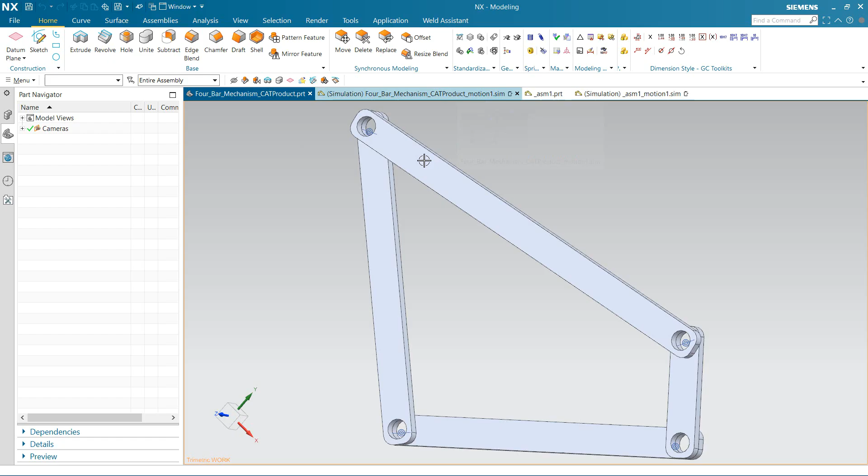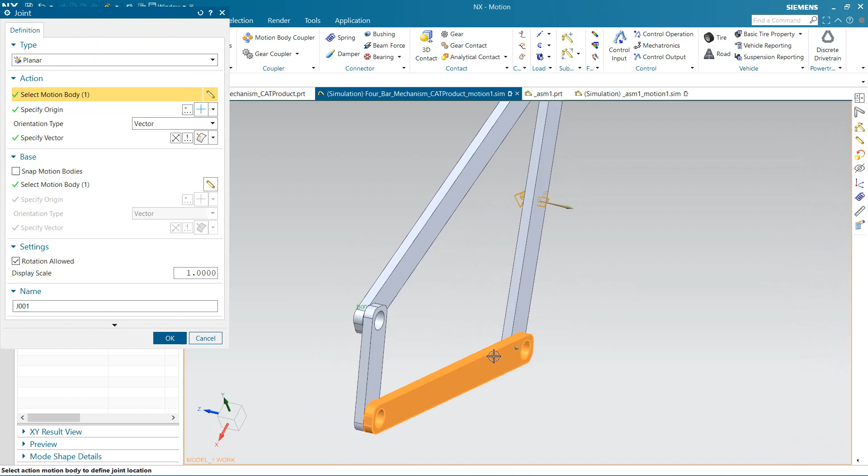So let's get into it. I just need to put these two things together. This is called a planar joint. So basically, if you want that thing here to stick to this plane of the object, or just stick to any plane, you can do that.

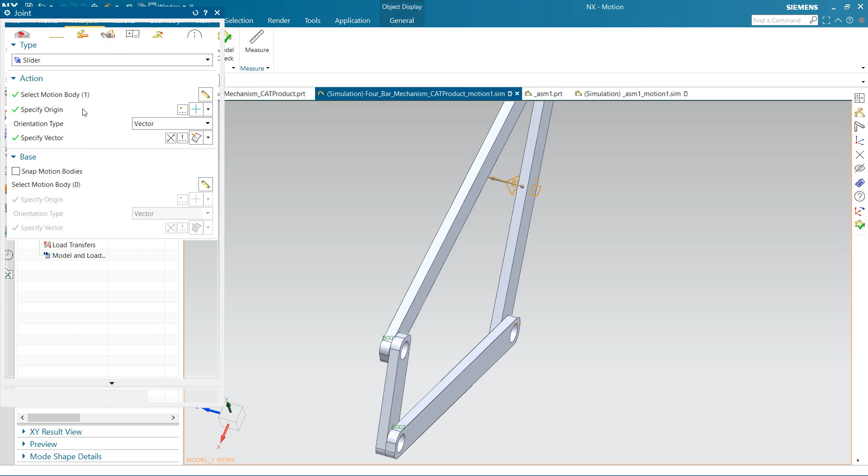I also created a slider joint here. Let's see how it works. Just play that. As these two join here, the slider joint only applies to these two bars. So as these two bars move, I attach the planar joint from up to this thing attached to this plane over here, so this thing will always be in contact with that plane, and that's why it's moving with it.

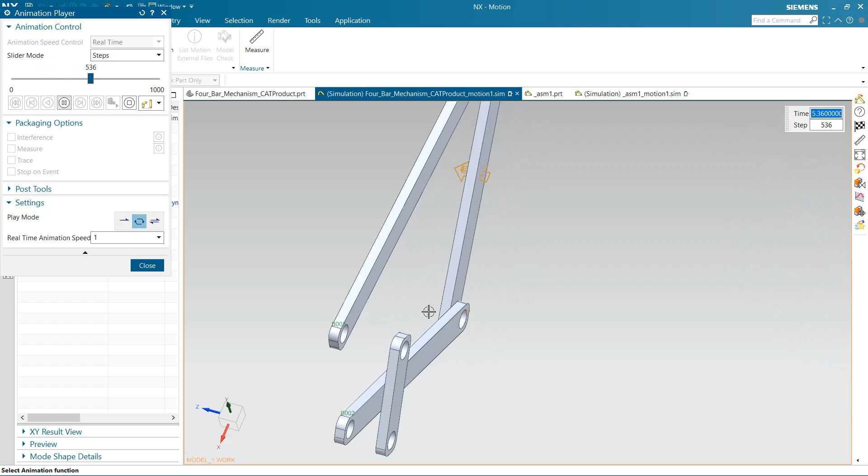Let's see what I want to say again. This thing here will always move with this thing, as you can see. Now let's try to do it. These are very simple ways, so just delete the solution. Two bodies that I want here - we don't really need to lock anything down, it's just a basic mechanism.

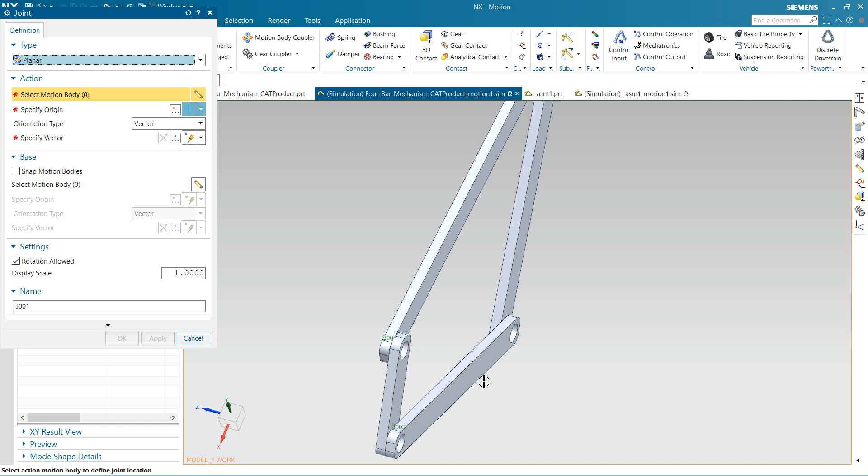So let's create a joint. First, attach this one to this one here. The vector, I will say there. Origin, I will say there. Click OK, and I think that's it. Yeah, that's a planar joint for us.

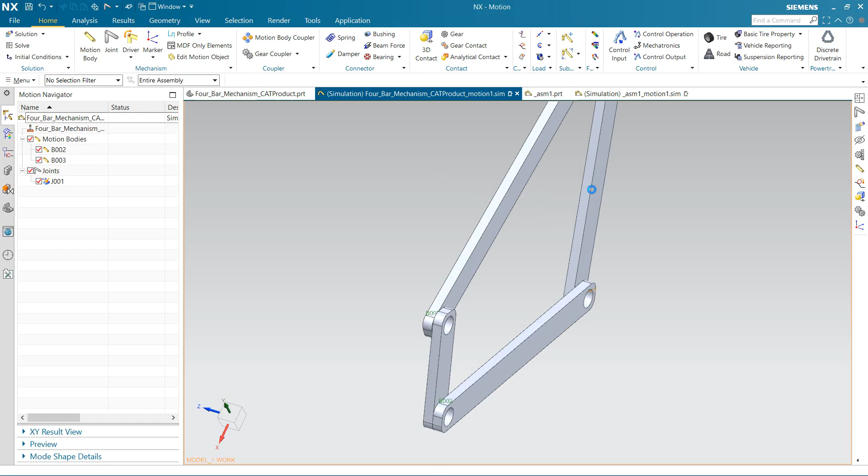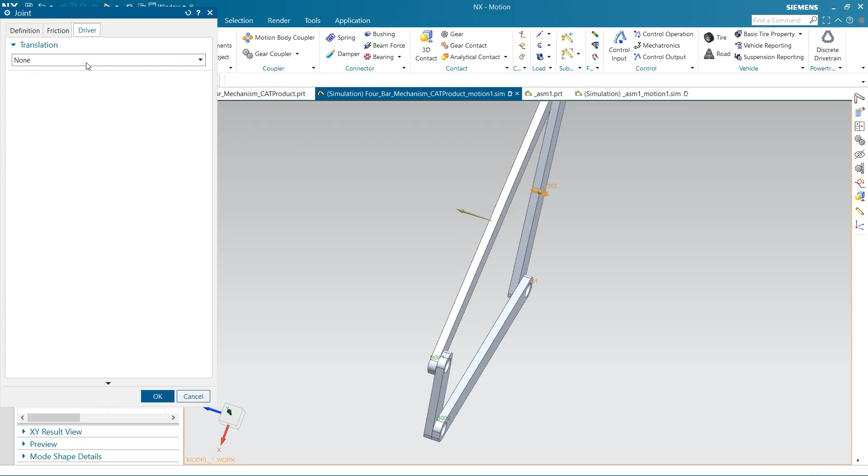Now let's create a sliding joint. It's actually anything that you want, I just want to create a thing so you guys can see it more clearly. Vector, I would say this side here. Need a driver, sorry. I would say 10, maybe 10 to 15. Let's try it out. Solution, 10 seconds, make it long and solve it.

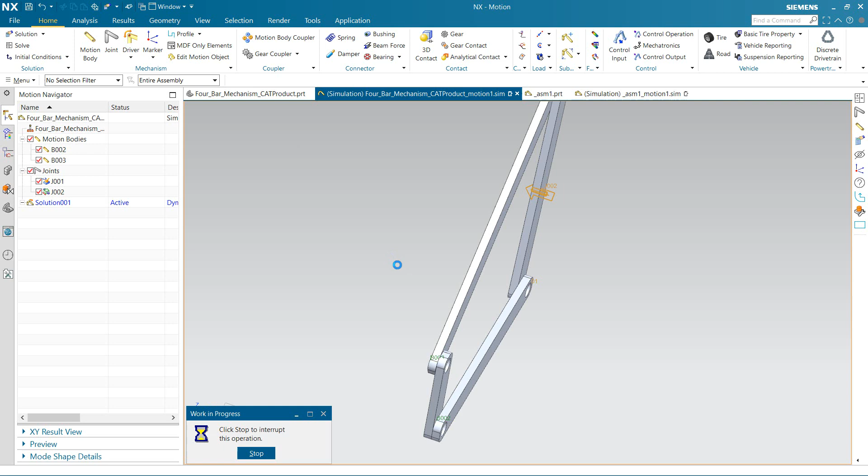Okay, let's try it. So that's the joint for you. It's very easy to use, and it can be used for many other reasons, like the bone structure of a human actually uses this joint. So if you want something to resemble that, this is actually a choice for you to use this joint. I think there's many applications out there that use this joint.

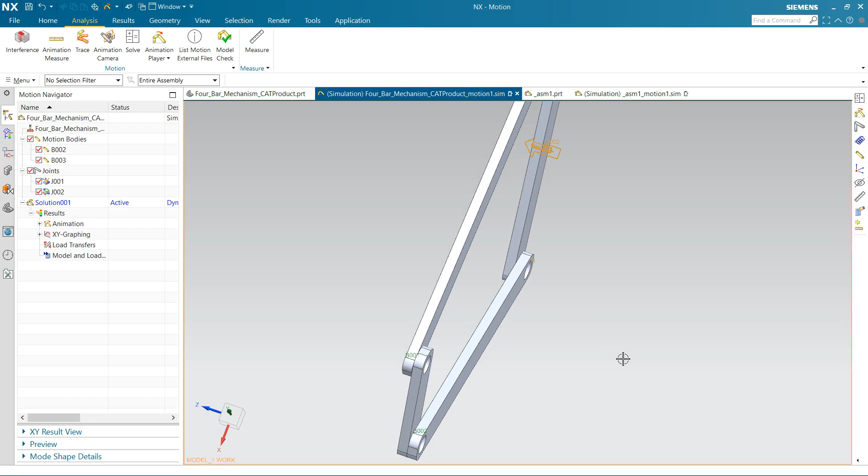So the next joint I wanted to talk to you guys about is the inline joint. For example, if you want this head of the bar here moving up and down, however this head of the bar here will only move in the horizontal surface, you have to use that joint.

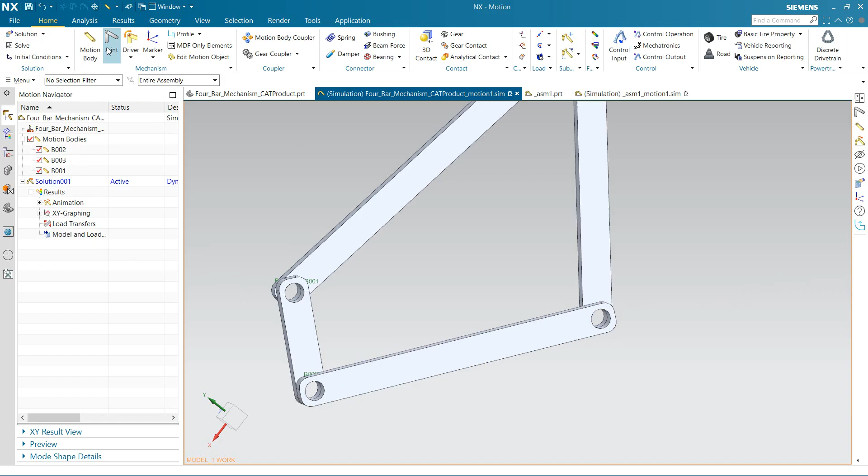So let's try it out. Delete that. The motion body, you have to create another one for this situation, which is this small thing here. This one will move up and down along with this small thing here, and this one will move horizontal. Let's create a sliding joint for this thing. The vector is that way. Let's click OK, it will go with the environment.

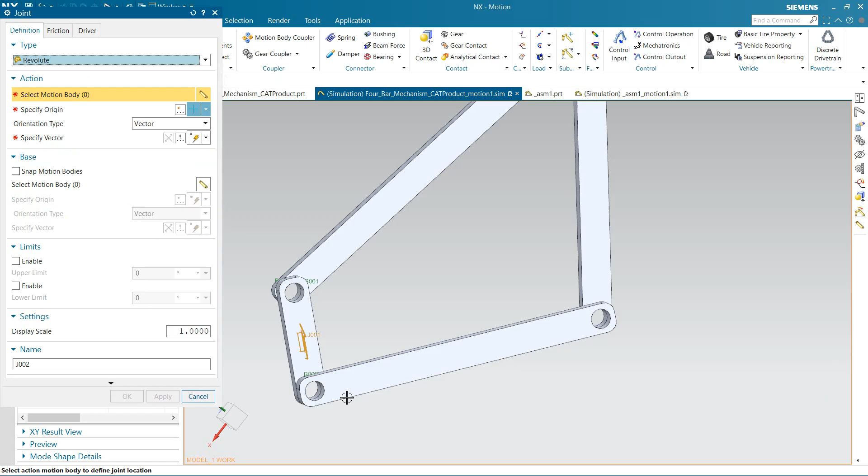I will create a harmonic function for it. I'll talk about that a little bit, but it will be much easier for you guys to see if you're using this function. Next, let's create a joint. This one here is actually spinning around this head, so we need a revolute joint. You guys cannot imagine right now, I don't know, but right after this, you guys will know how to use these tools easily.

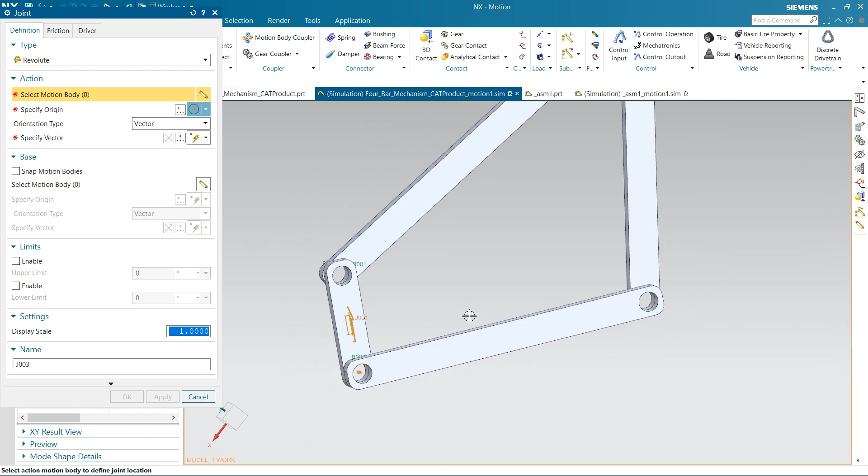You move along with this body here. So basically this one will spin, this bar here will spin along this bar at this point. So why does it move up and down? And then the inline joint here that I want to talk about today.

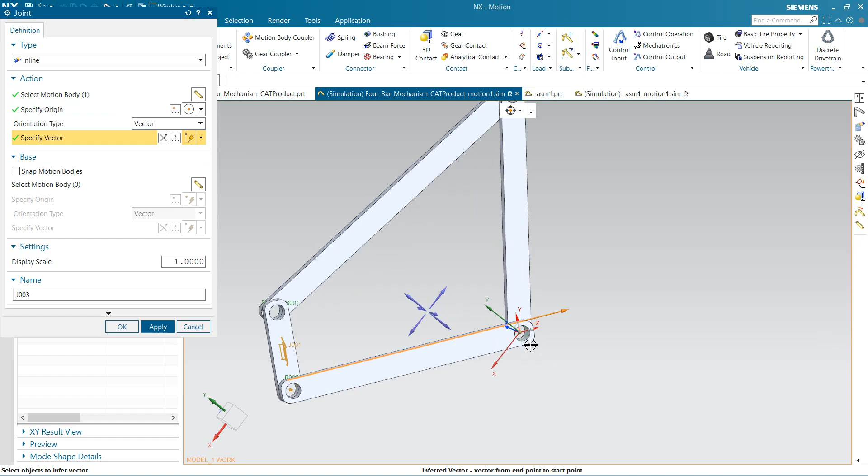So create a motion body, select another origin and the vector. So what it says in this setup of choosing here, it basically means that this point here will always be moving along this line. It's not going to go up, it's not going to go down, it's only moving along this vector here. That's why it's called an inline joint.

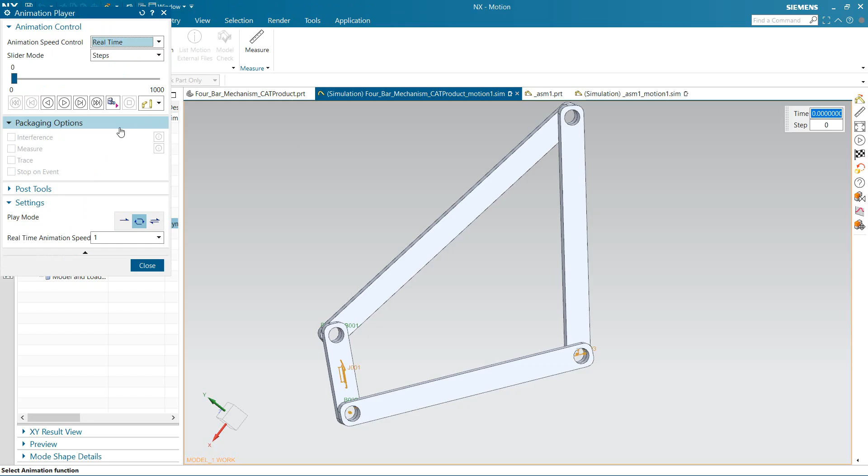Okay, I think that's it. So let's try to run it, see if there's any problem. I think it will be okay. Let's see. All right, it's good.

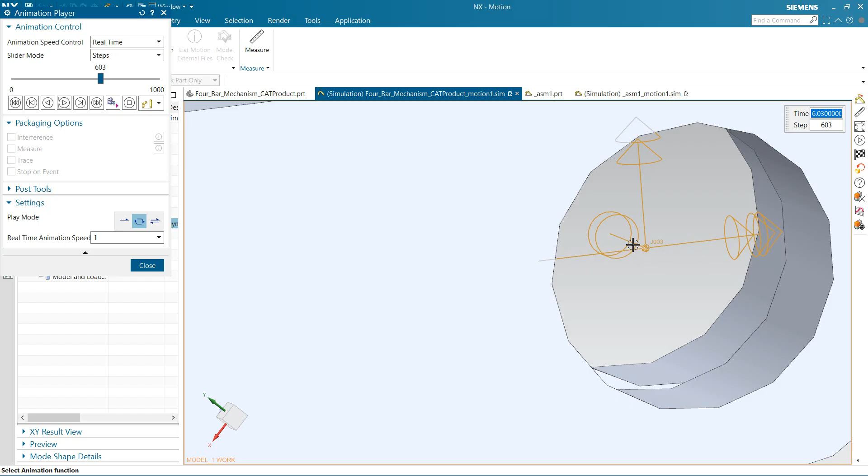As you can see here, this head of the bar here will only move up and down because of the revolute joint and the sliding joint. However, this head of the bar here only moves in this direction. These two arrows mean that it is restricted, however this here appears to be longer than the two other arrows - that's the line that this point can move along.

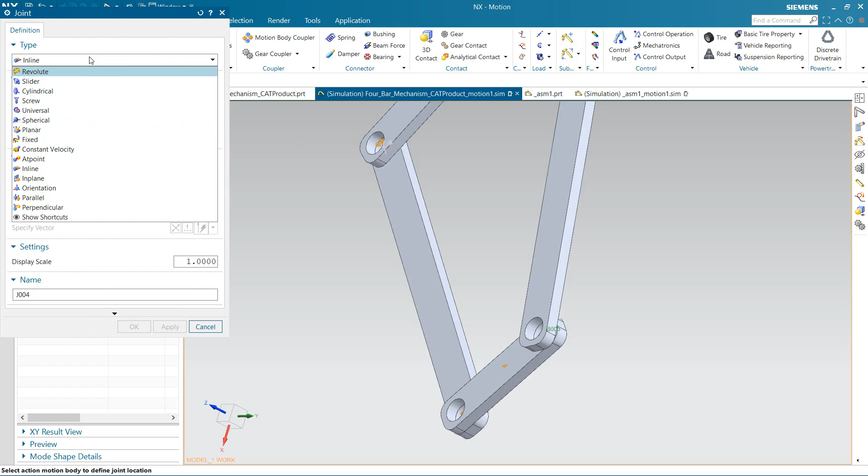Okay, so those are the two joints I wanted to talk about for now. Many people actually use this planar joint here attached to this part to remain stitched to the surface and remain stable on the surface for the mechanism.

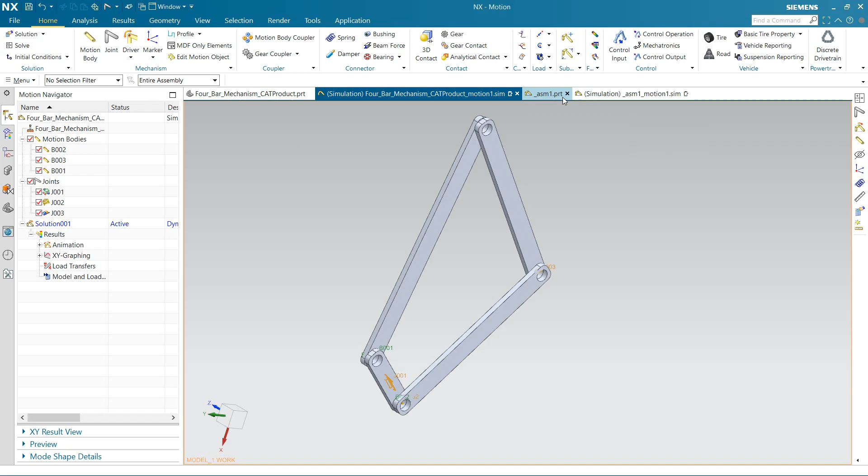But it's up to you guys to use that. I just want to talk you through the tools you can use. There are many complicated designs where you just want to use a mechanism and stuff. So next I want to talk about...

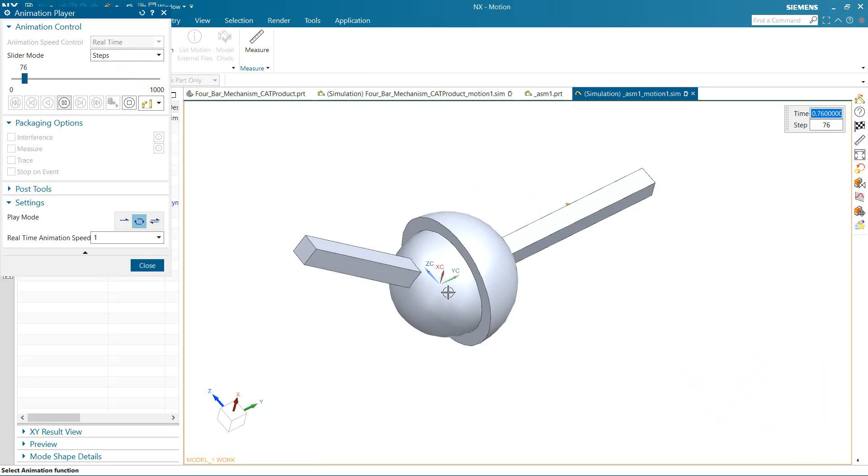This is actually like a spherical joint. Many people call it a ball joint, but in NX it's called a spherical joint. Basically these two parts will always stitch to each other, a surface with fit as in the design, and this thing will move along as well. It basically restricts all the sliding joints possible. The only thing allowed to move in this joint is the spinning, and it can spin anywhere, as you can see.

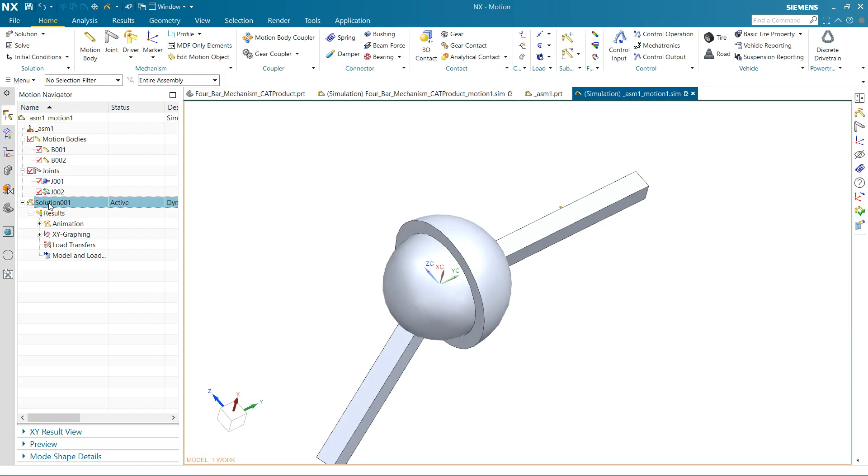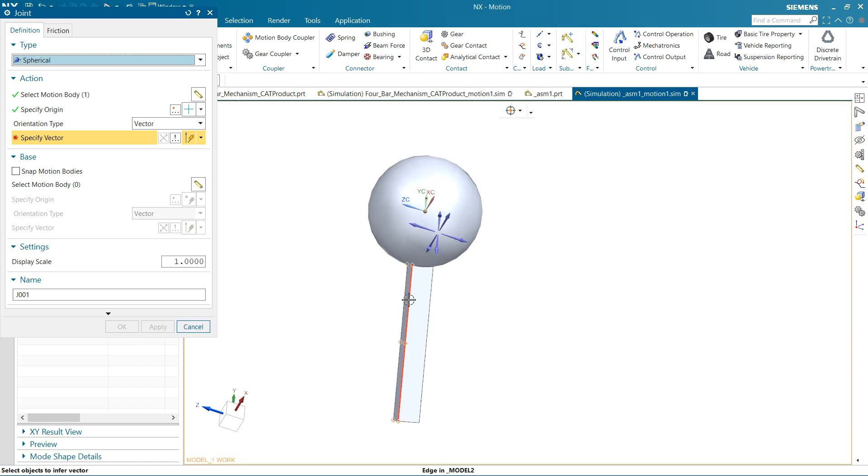Let's try that. First of all, delete the joint. Let's try some simple things first. If you guys do not choose the base body for the spherical joint, it will appear like this. Origin here, vector I would say along this bar. Just click OK, let's check that again.

Because I want to use gravity in this simulation, you would not use none for this mass and properties if you want to use gravity. If you use gravity, it has to have mass—either you define it or it's automatic. But you need to have some kind of mass here. In this case it's like 18 kilograms, and you need that number to use gravity.

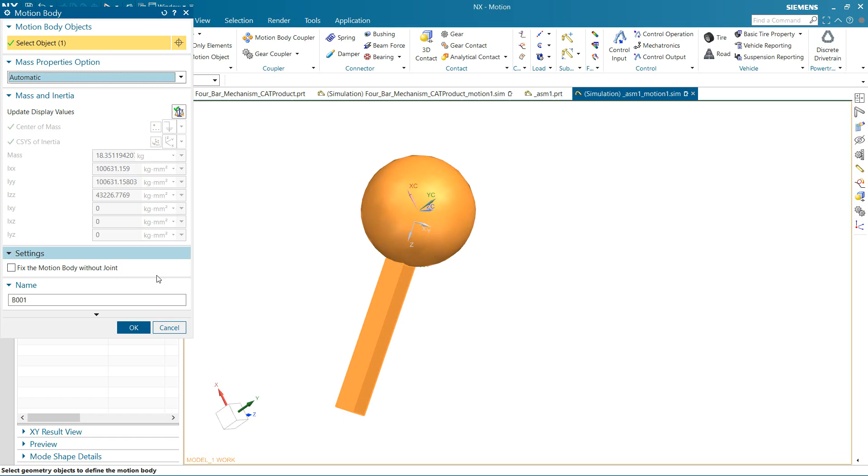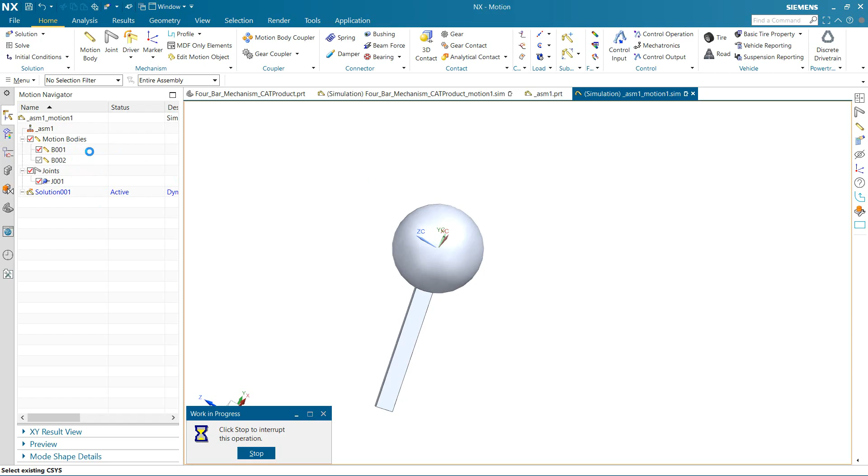So for the solution, I would say gravity. Okay, that's good, maybe 10 seconds. Let's solve that. If you don't put mass in there, you use none, and this thing here will just stay forever—it's not going to move.

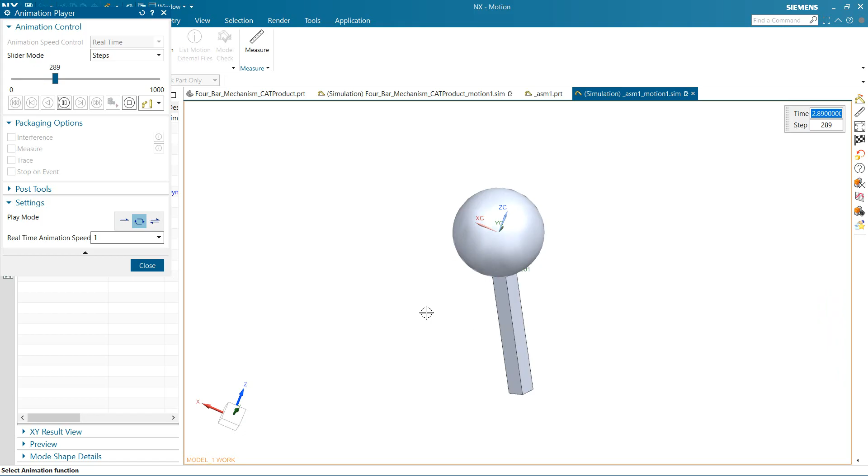So play it. Yeah, as you can see, it's only spinning up and down. The gravity is actually this way, so it's basically moving in a harmonic function, like a clock and stuff. Okay, so that's it. Now let's stitch it to another, a bit of higher level.

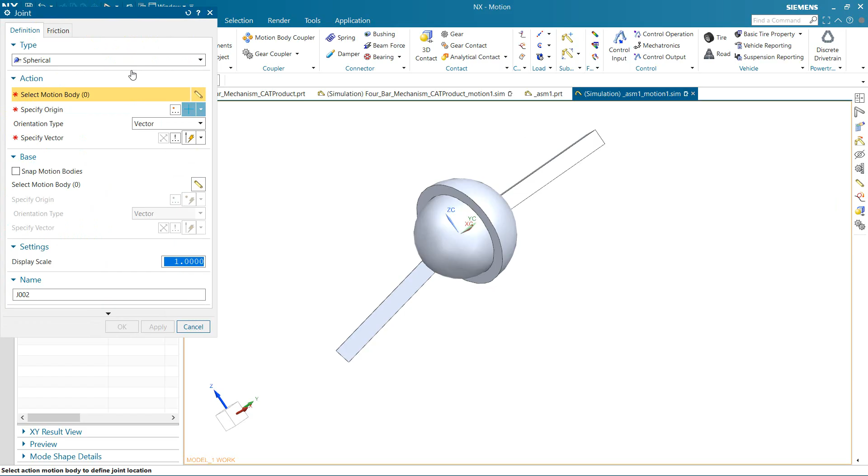If you want this here to stitch to this one, you basically just need to choose the base body for it. And then, like I did here, I would create a cylindrical joint motion body—base vector along this line, origin always at that point, driver. So this is like the combination of the sliding joint and the revolute joint. It can move along this line as well as spin along that center. So that is a very useful joint to use.

So let's say it's 15—no, no, sorry, that's 180. Translation, 15. Click OK. Let's check that again. All right, so solve that and let's try it.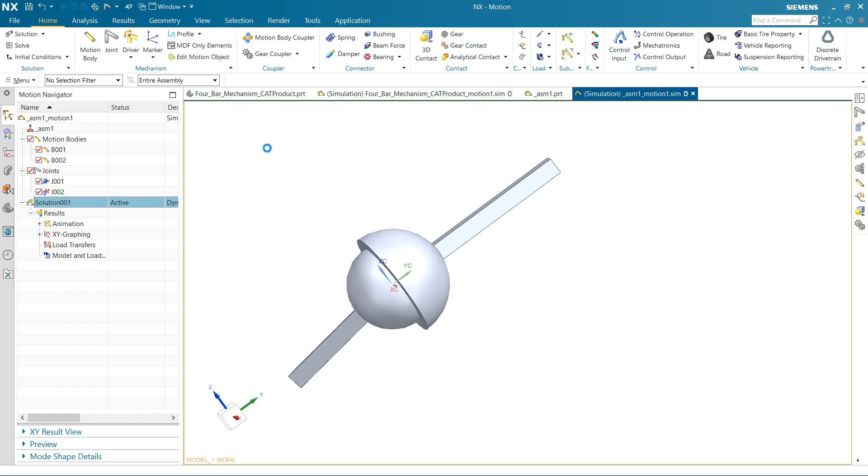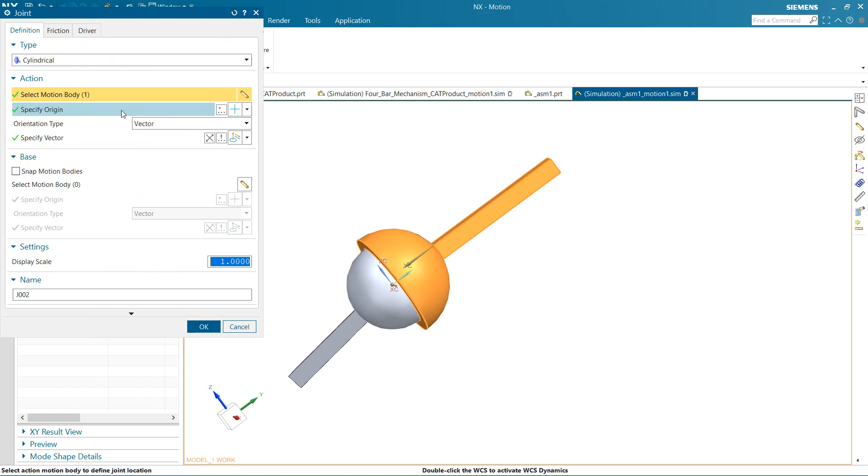Okay, oh, it's moving. So as you can see here, there's no contact between these two, but you can see it's only spinning there. Of course you can limit the movement of the bar here, but for this section I would just fix that a little bit. Change the vector. Okay, solve that.

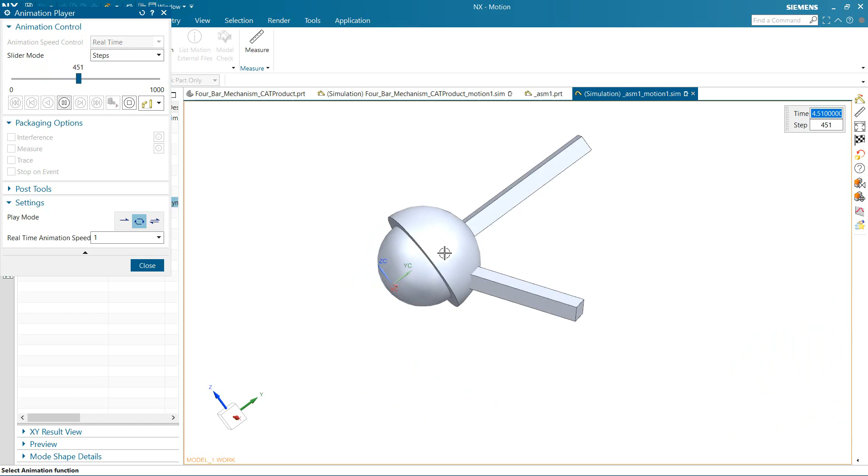Let's play that again and then let's see. Okay, so just so you can see it easier, it's moving upward. So I think that's it for this class. I just wanted to guide you guys through some basic things, some basic joints that you guys might not know are available, or may not use as efficiently.

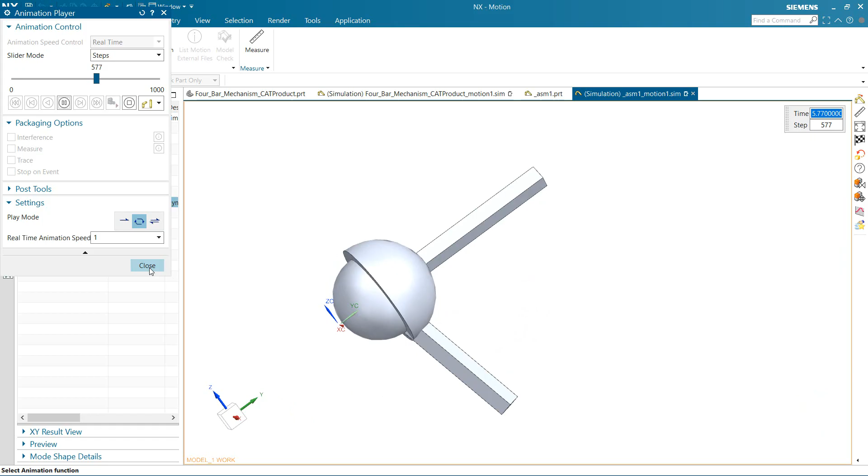I had to spend a lot of time figuring all this stuff out. At first, even though I attach the spherical joint to it, even if this thing moves, this thing just stays in place at this origin.

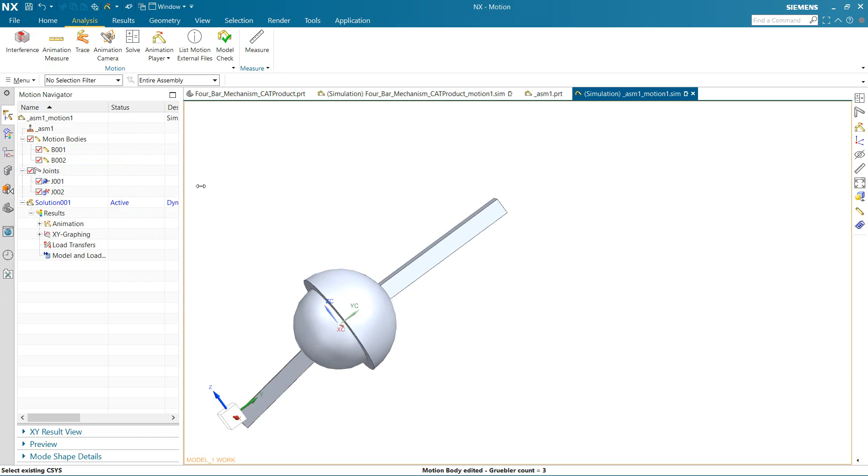And also about the gravity here—if you don't put mass, for example none, just hide that, just delete that, let's try it. If you don't have mass for it, the gravity of course is not going to affect the object.

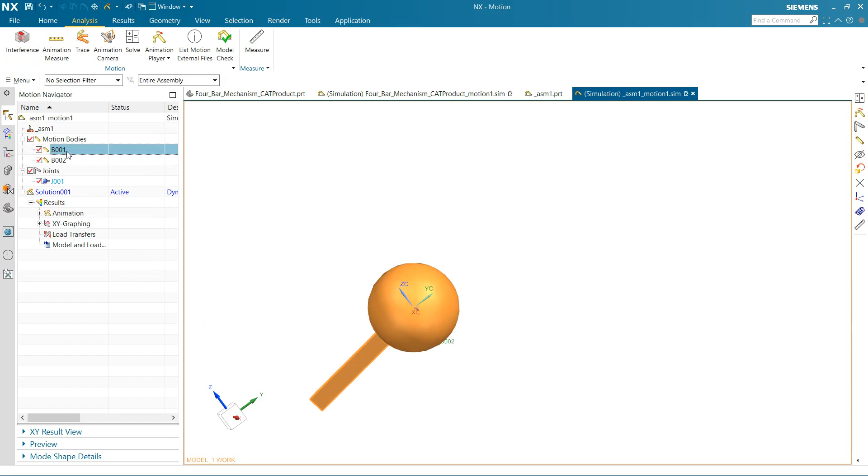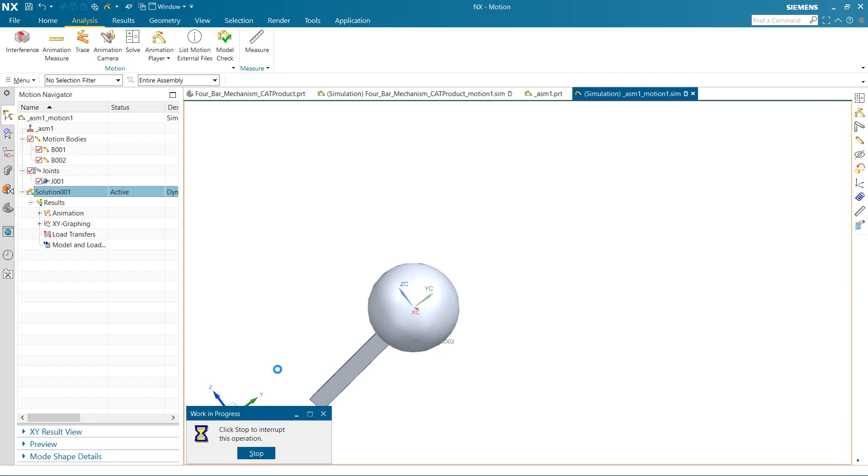So it took me a while to figure that out. As you can see, it will stay in place, it's not going to move. But right after you put mass or anything, it should appear. And then solve it, then create some animation for it. You guys can see there's a small detail that affects the whole process.

Okay, so that's basically it—you don't really need that anymore. So that's basically it for this class.

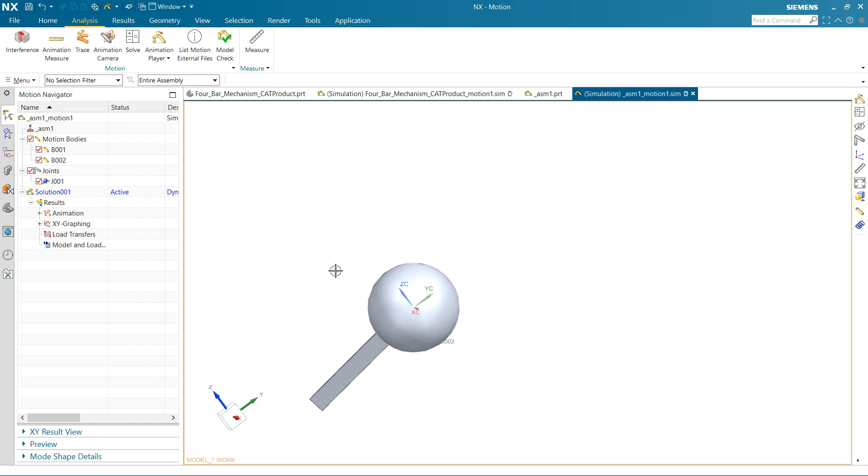Today I just guided you through again some basic tools and basic joints you guys can use. These two things are always the most important tools, because in this joint menu there are like 15 kinds of joints you can use in this motion. But really there are just about 5 or 6, or maybe 7 if you're doing some complicated mechanism. The most basic mechanisms here are always a revolute joint, a slider joint, and a cylindrical joint, because most mechanisms out there use these three—it just takes a little bit of imagination.

For example, with a planar joint, you don't actually have anything to fix it into the plane—you just say that it's fixed, you just constrain that in the software, and it's not actually happening in real life. So these three here, however, actually happen in real life.